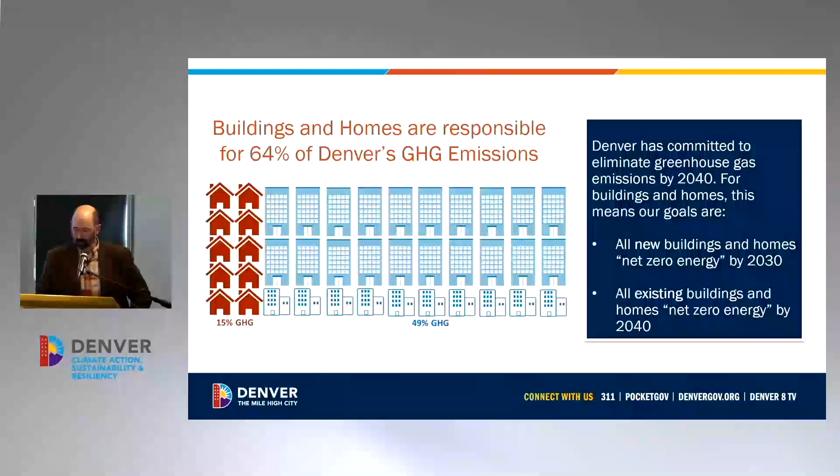And these are also the buildings that when we look at them, it's the space and the hot water heating. A lot of people talk about cooking and other appliances, but the bulk of the energy use comes from space and water heating.

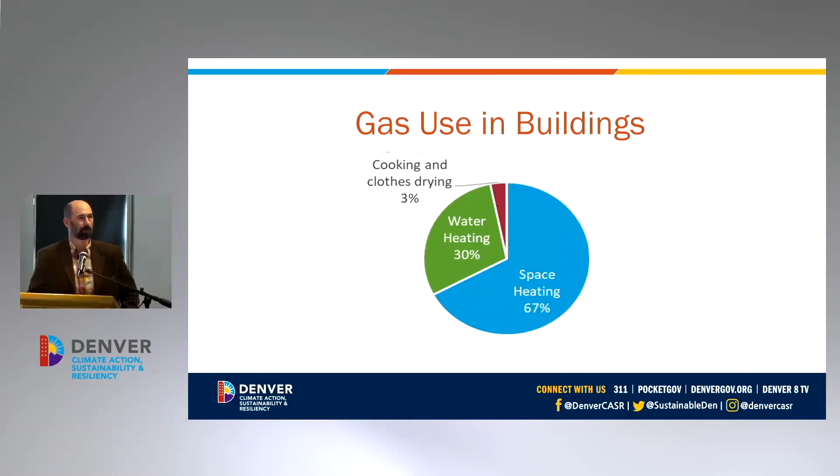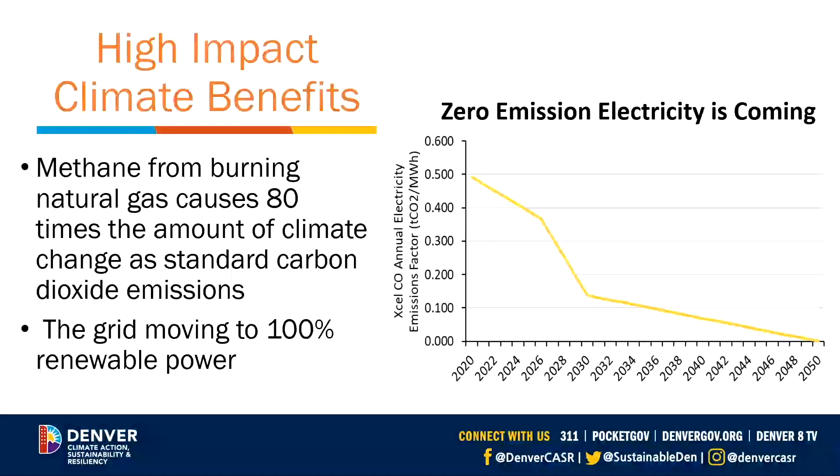So when we look at these, we also know that our grid is getting cleaner. We know that the grid will move to 100% renewable power, and that the methane that we're burning is 80 times more impactful for climate change than carbon emissions. So we have a clear and direct goal to reduce the impacts of burning fossil fuels.

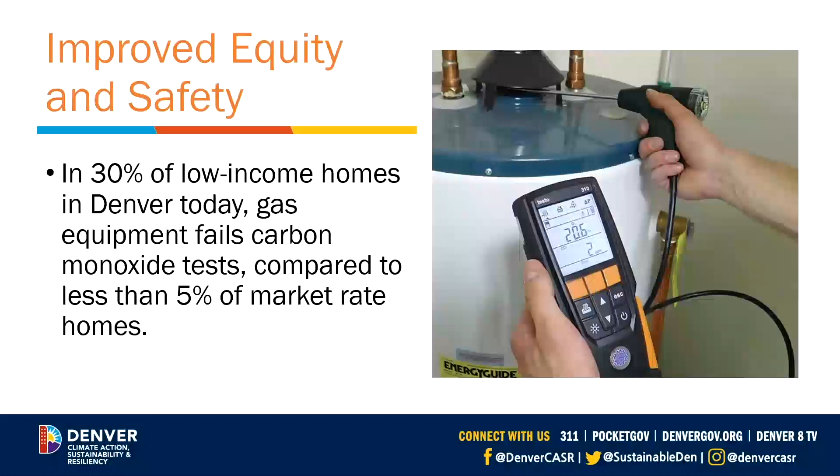We also look at safety and health and safety of people inside of buildings. And we know that 30% of low-income homes in Denver today have gas equipment that fails carbon monoxide tests. This is important that we look at these low-income, at-risk, and under-resourced buildings as a place where we want to have healthy homes also.

So what are we doing about that? We have actually looked at electrification requirements, and these requirements are really about at the time of replacement for equipment, and much like what Sharon and her panel talked about, they phase in over time. In March 1st of 2023, you'll hear me talk about March 1st, 2023 a few times today, the permit processing changes, and it changes for the gas systems and AC units that are for all building types.

And this is all the commercial and multifamily buildings, not just those over 25,000 square feet. And it is for the hot water, tank type hot water heaters, rooftop furnaces, AC units, and indoor forced air furnaces. And then over time in 2025, we were looking to replace furnaces, and rooftop units will be required upon replacement. And that is a shift that we're preparing for in 2023 and 2024.

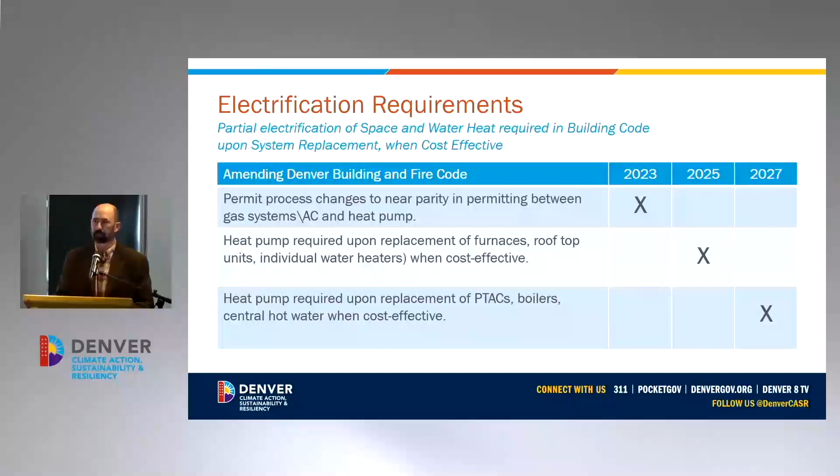And lastly, in 2027, the heat pumps will be required for what we sometimes refer to as our harder to electrify systems: PTACs, boilers, buildings like this on steam, and central hot water systems. And again, these are when it's cost effective and when it's achievable. And so the panel, we will talk about what that means today. What is achievable? What is feasible?

So as I talked about, the first deadline coming towards us is March 1st of 2023. And when you're replacing these systems, these unitary AC systems or condensing units, your hot water heater, your natural gas furnace, upon that replacement, we will actually be changing the code requirements, the permitting requirements change.

So the first thing you'll see is the quick permits are going away. Those are no longer going to be available. There will be ability for the replacement of emergency replacement. But again, that is something that is for emergencies only.

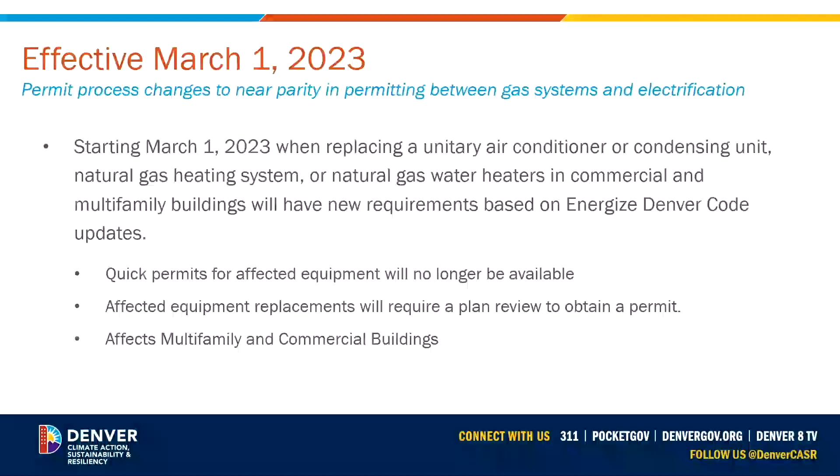This is not, for if you're trying to put your AC unit in January, it's not an emergency. We know that, but we will be monitoring those and working with building owners and contractors with community planning and development. And then we will also be changing how the permitting goes through.

And I'm going to encourage all of you to start this. If there's one takeaway, it's to start planning earlier for your equipment replacement, no matter what your building size is, and to start thinking about how to electrify. And Andrea will be talking more about that, and Celeste will be talking about that at the end, some of the equipment options, and to really make sure that you're thinking of all the options that are out there.

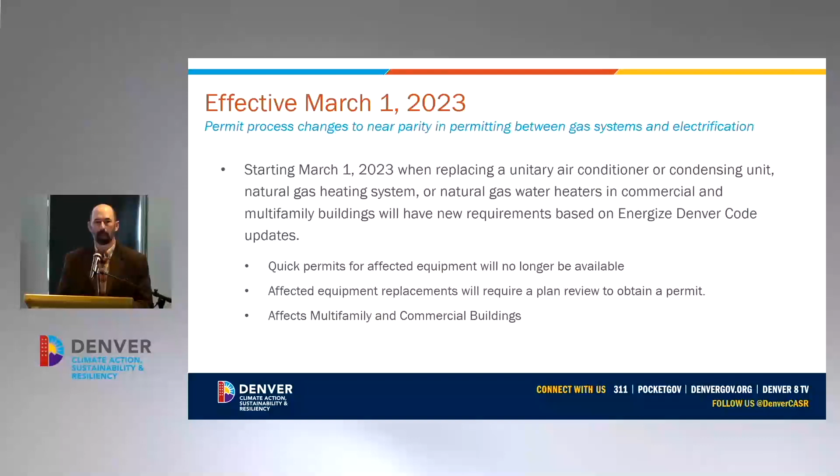And it's in 2023, it is still allowed to put in gas-fired and regular AC units that are non-heat pump, non-electrified, but the code requirements do change. So I would encourage you to check out community planning and developments requirements as we get closer to 2023, to that March deadline, and really understand what are the requirements for the right sizing, gas line leak testing, and for the emissions requirements and safety standards.

So as part of this, we're setting up an entire program. We know that building owners, especially those most at risk, are not able to just say, I see your code, I can afford to go do this, it's easy. These things will take some changes. So the first one we're setting up is feasibility reports.

These are one of the compliance pathways for if you're going to put in gas systems. This allows you to actually realize: can I do electrification? Can I do partial electrification in my building? What systems are able to be electrified at a reasonable cost for my building?

Our hope is that this is something that's educational for contractors, building owners, and for ourselves, to find the pathways to electrify buildings, and then push that back out to all of you through our website and through presentations like this. Our goal is to get about 1,200 of those through a year.

Ideally, these are buildings that are early adopters that are trying to figure out how do I electrify. And if they cannot, we're still allowing for natural gas replacements.

And to that end, we're trying to set up pilots right now. Both Pastor Scott and Kathleen will talk about the pilots at their sites. This is very much a learning by doing.

Denver's at the forefront of electrification, building performance standards, and a lot of things around climate action. So we need to learn by doing and understand how do we do this best. How do we actually stand up programs that are not just a prescriptive rebate that pays you per ton of reduction of emissions, or a standard rebate?

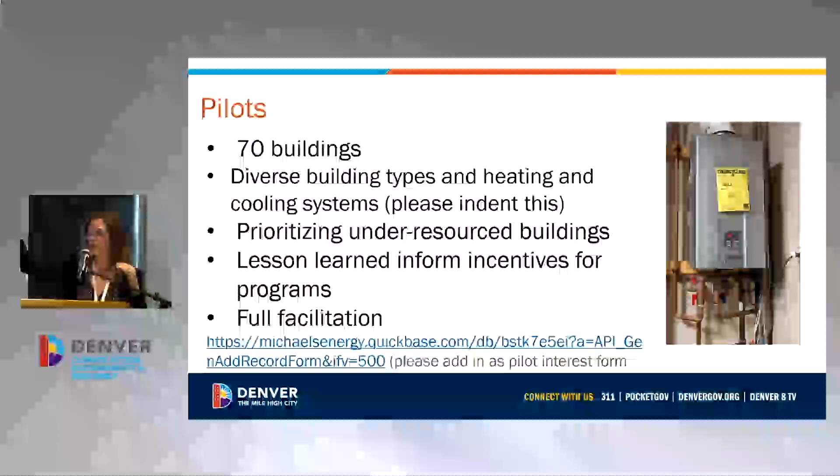There's going to be a program starting in March of 2023, which we're going to talk about. There's going to be an incentive program just for the electrification feasibility reports. And then also a program starting, probably rolling it out based on equipment type as we learn about different equipment types and what the costs are, what the challenges are, et cetera. I imagine most likely we're going to roll out one for heat pump water heaters first.

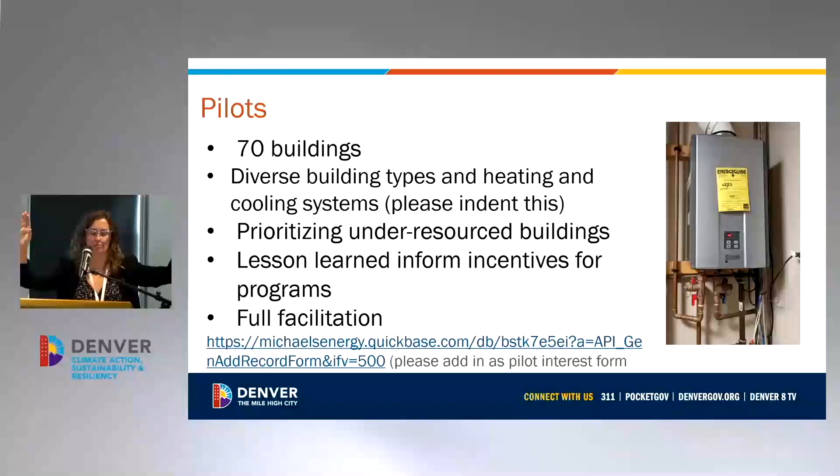And there will be incentives just for the equipment. The reason we're splitting those two is because in the pilot, you got to do both, okay? But if you decide, to heck with it, electrification is the way to go for me, it's going to reduce my EUI, I already know I want to do it - we're not going to make you do this. We're not going to make you do the feasibility report. You can just go ahead and electrify. That's great. So that's why it'll be 2 separate programs.

I want to give you a little preview, the Dork preview. This is the Dorky preview of the next 2 speakers.

So why are we doing all of this? We're doing it for buildings, right? Guess who is in buildings? People. People growing, people living, people crying, people laughing, people working. And that's actually what's motivating us is the people. You're going to hear from the people and what's actually happening in those buildings in a minute here.

So here's the Dork version of these buildings, and then I'll let these guys give you the human side. On your left, we've got Earthlinks, that's Kathleen. We went on site - by we, I mean Michaels Energy went on site.

But we are not doing these electrification feasibility reports. We partnered with 3 firms. We already taught them how to do the electrification feasibility report. So other people are doing this - Denver's not doing this, Michaels Energy is not doing this, right?

So Solutions Mechanical went with us on site. What they've got there at Earthlinks is they have a rooftop unit that has long since stopped providing cooling. It's starting to fail. They have a swamp cooler that kind of keeps it sort of comfortable in the summer, right? That's what they've got.

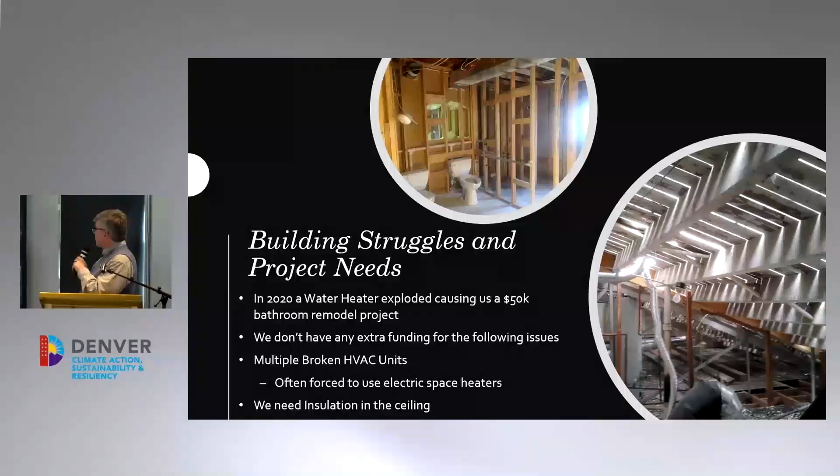Our roof has been replaced 3 times since I've been there. And the second time they replaced it, they had to strip all the shingles back, and we discovered that there was no insulation in the rafters. So we need insulation in our rafters as well.

Multiple broken HVAC units happens all the time. Right now, we don't have 2 of them that work on our rooftop, so we're using space heaters in one of the areas where the kids meet. So yeah, we have some needs.

So my desired outcomes, I would love to learn how to manage our energy more efficiently. I wear a dozen hats at the church, I'm the only full-time employee there. So I have to figure out how to take care of the building.

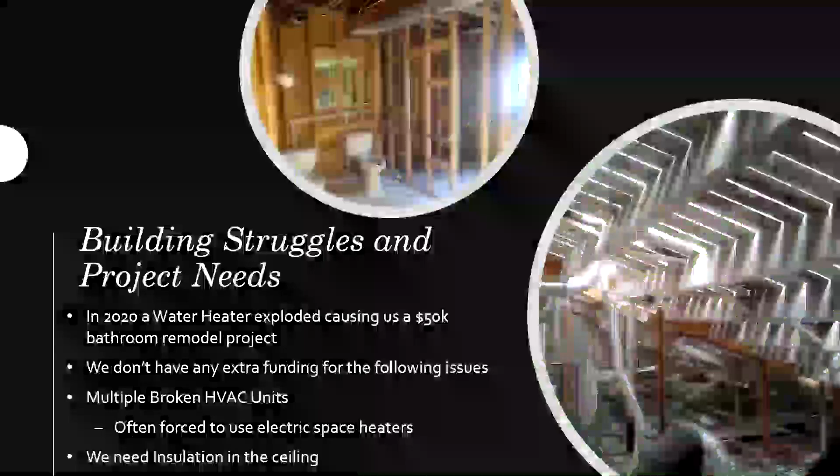I just now discovered after 20 years, I'm a quick learner by the way, that I can reduce our energy costs by not having everything programmed at the same time. I programmed everything on my 8 thermostats at the same time just to make it easier for me to remember the program, but because of that I get these demand charges which raise our bill through the roof. I just now figured out that if I can stagger the programming, I can lower our bill, and I can also get us onto a different energy plan at Xcel.

So I just learned that now, I should pat myself on the back for that one. And then also, I hope to lower our energy bill. So we will see, we're a pilot program, and we're looking forward to our partnership with these fine people up here. Thank you very much.

Hi, I'm Kathleen Cronin, also Vanna White today. I'm going to show you some show and tell. Thank you, I'm from Earthlinks.

Earthlinks is a nonprofit. We're located in Sun Valley, so we're almost neighbors to Westwood. We're right at the corner of 13th and Decatur. It's a bustling spot right now of construction, so if you can get to us, please come by.

We work with adults experiencing homelessness. We have 2 parts to our mission: one is to care for the planet while we care for each other. We've been around for 26 years. We have about a 70% success rate on getting people housed once they're in our program for more than 6 months and keeping them housed. And the way we do that is because we do case management without anybody knowing that's what we're doing.

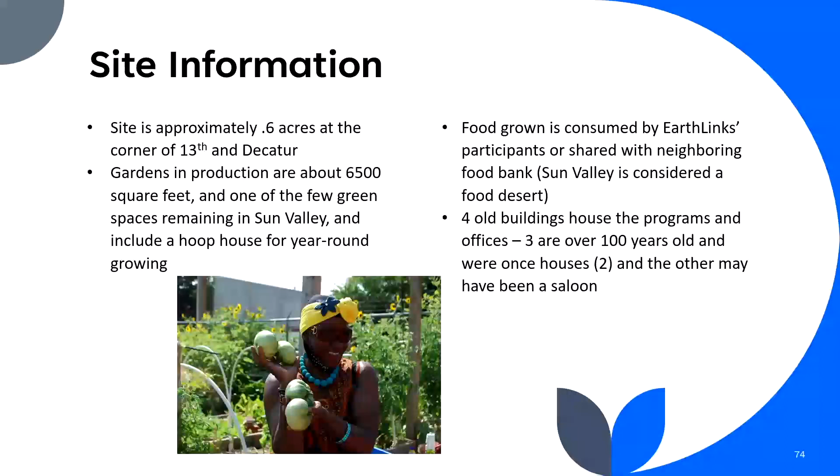So our site is about 0.6 of an acre. It's one of the few green spaces remaining in Sun Valley. Sun Valley has long been an ignored neighborhood in Denver. It's under a huge redevelopment process managed by Denver Housing Authority right now, and pretty much everything's going to be apartment buildings in the neighborhood. At the present time, our garden is about it for green space in the neighborhood.

We do open it up for the neighbors to come and visit, but the garden itself is managed by our community, so it's our community's garden. It's not a regular community garden. We have about 6,500 square feet in production in the garden right now, and we have 4 buildings on site.

So we purchased this property also really by faith, quite frankly, and a loan or two, but nonetheless, we purchased it in 2013. And the reason we got this property was because the beer people and the marijuana people did not want it. So we have on site our 4 old buildings and a number of other little sheds we've added, but the buildings themselves, 3 of them are all over 100 years old. 2 of them were homes.

They are in pretty dire need of being replaced. The 4th building is the building we're actually talking about in this project. It's our baby building. It was built in the 1960s. This is sort of a picture of it.

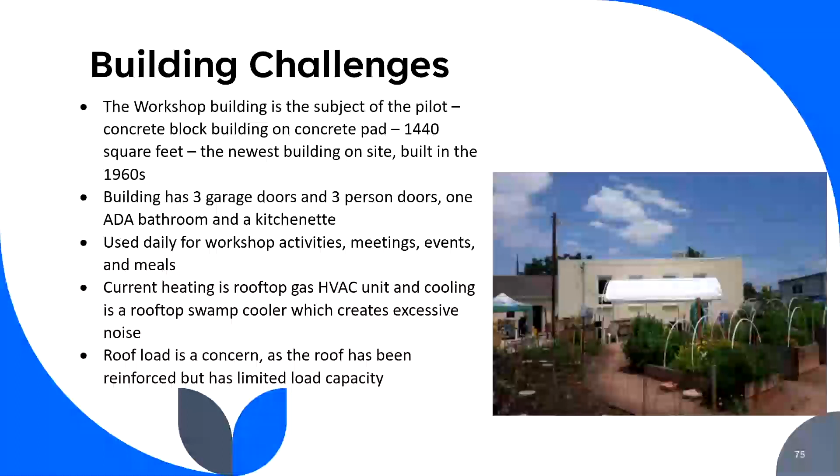We have a swamp cooler. We decided to do the swamp cooler when we did this because we felt it would be a better ecological choice for us to do. And I think it probably is, if you just don't need to talk or use anything in the building, it would really work great. But we can't really have our programming going on while it's running because no one can hear each other, or the stuff we're working on is blowing around. So that's been an issue for us.

So we've been really fortunate to be able to be one of the pilot projects, learning what's going to happen, just a few minutes ago. That's kind of what we're doing there.

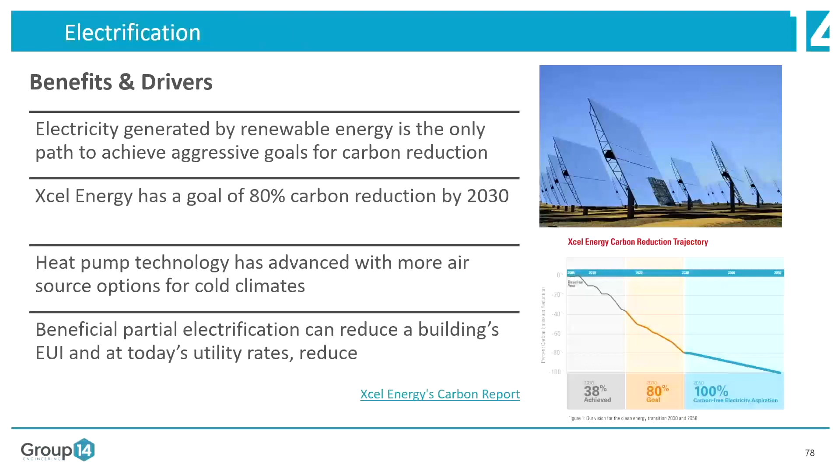So we've heard a little bit of this as Jeff started on this really awesome trajectory. We're very fortunate that a lot of our projects looking at decarbonization have Xcel Energy doing a lot of this for us on the electricity side. That trajectory is going down to 80% reduction by 2030, with goals to have a completely emission-free electricity supply by 2050. This pushes us towards electric energy for all of our needs - cars, heating, water heating - taking advantage of what the utility supplies and what we can also supply. We can't drill our own natural gas, but we can put up solar panels, or subscribe to community solar to get to truly carbon-free building operation.

One of the other drivers here is that heat pump technology has come a long way. I'll touch on a couple things where we still need improvements, but it's getting there so we can do cost-effective operation. Electric resistance heat has been around a long time - there's buildings in Denver already - but they're pretty expensive to operate, so we're looking at heat pump technology. Also looking at partial electrification. We heard that some of the buildings in the pilot are going to keep some natural gas, and that can be a key component to reduce first cost and those peak monthly costs we heard about at the church.

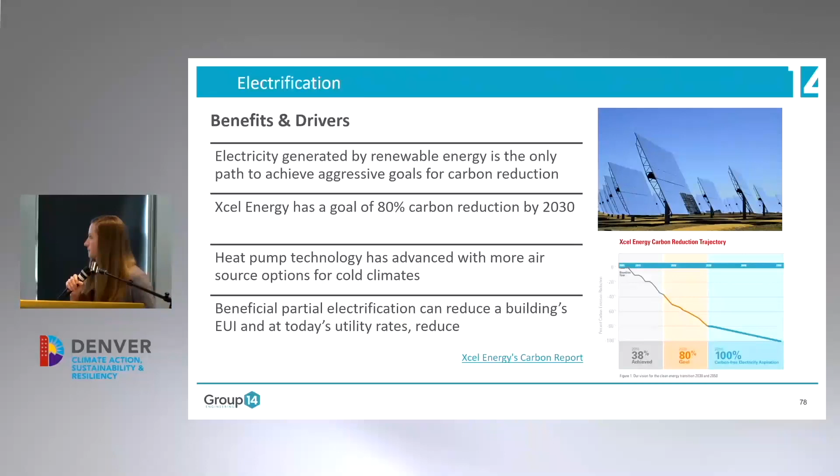Oh. Here, Zach. All right. So this is where we're talking about that partial electrification. See if it comes back. We'll just keep going - do we have any thoughts on this?

The easy-to-electrify or medium-to-electrify systems are going to be our early categories of focus. Some of the timing of when we're looking at electrification - we intentionally put up a picture of a building that's very gutted. That's going to be your easiest time to electrify, when you're already replacing the piping and getting stuff down to basically the structure of the building.

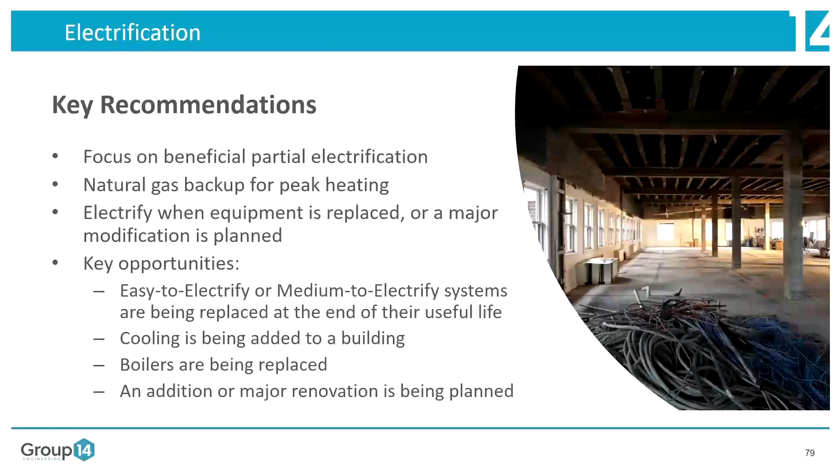There are other times where you're at least adding cooling or replacing your boilers, so there are key points in time when electrification makes the most sense. The code is requiring electrification at the time of replacement when you go to the building department. The city at this point is not going to any building and saying you have gas equipment, rip it out - that's not in the current plan. What's in the plan is that when you go to replace it, you're going to have specific requirements.

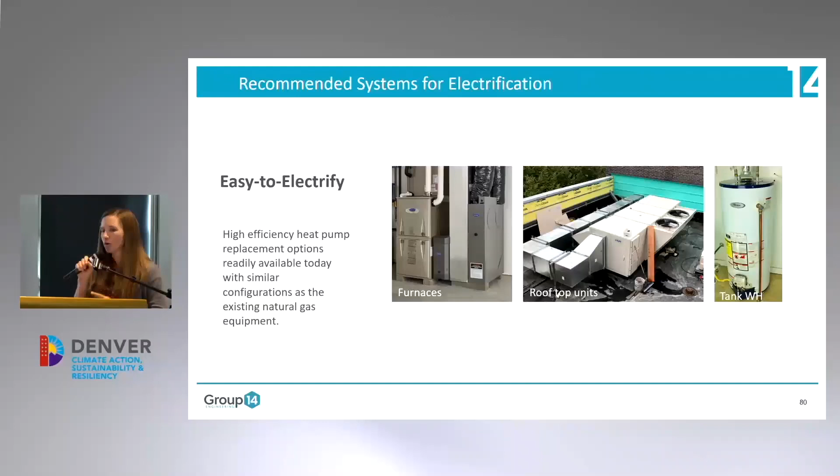So we have the guide divided into a few different sections. One, the easy-to-electrify, aligns with what's going to be required in 2025. This is also what's going into these electrification feasibility reports - EFR, that's a lot easier to say, so I'm going with that too. These are the equipment types. The reason we're calling them easy - I prefer easier - is because there are still some changes required, but they're easy because they're available today.

There's equipment that is very similar, looks pretty similar, and can often go right where the old equipment went. You might have to do some modifications to the roof curb, but pretty much the rooftop unit replaces the old rooftop unit, or the furnace replaces the old furnace. So limited modifications, good prices - some even at the exact same price as a cooling-only unit, you could get a heat pump version for a very similar price.

The tank water heater is another one where there's a bit more effort, because tank water heaters typically have no electric supply now, so that requires some electric supply, but it's the same physical size for the most part and connects to your pipes the same way. In the guide, it gives more information on each system type, considerations and challenges when it might not work, things like refrigerant line lengths. Won't get into that today, but keep an eye out - the QR code and link are there.

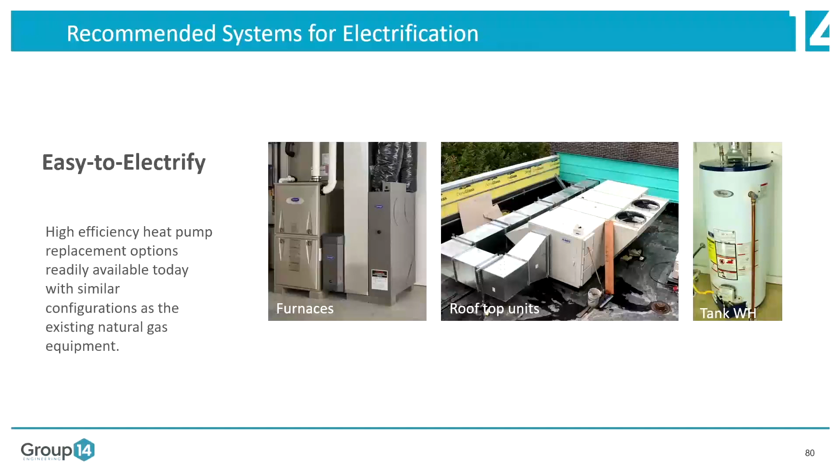The medium-to-electrify - this is a subset that's not going to be required in 2025 because this equipment is more intrusive. There's more replacement involved. What we categorize here is equipment available today in heat pump version, it just requires more invasive replacement. So you're going into every zone and replacing PTACs or VTACs. Unit ventilators are often found in classrooms, and there are heat pump options available for these today.

You can get a split air handler, it's just a lot more challenging in some of these cases. It requires running things throughout your building, refrigerant lines that you may not have today, so it's more expensive and really makes a lot more sense when your building is in that gutted scenario. But we put this in the medium category because you can get heat pumps - that's really the big focus. You'll keep hearing about heat pumps, we love heat pumps because they have 30% of the energy cost of electric resistance, so this is really where it becomes aligned with our operating cost needs.

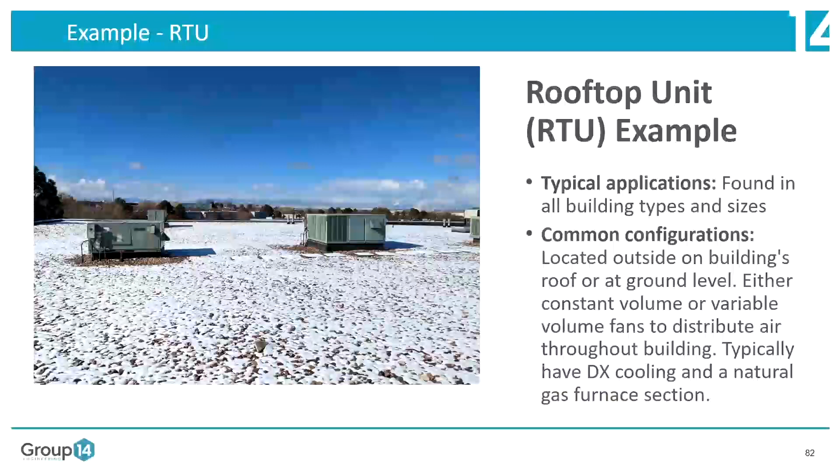Just an example, and I think the examples we saw here, I'll go through quickly since we already heard about this rooftop unit. You can replace these rooftop units with a very similar unit that instead of cooling only, has a heat pump that can both heat and cool. It looks the same, often has a very similar profile. Any new unit will be slightly different, even a new rooftop unit with cooling only will be slightly different, so there'll be some modifications. We'll have to work with an electrical contractor for the connections and a mechanical contractor for the air side.

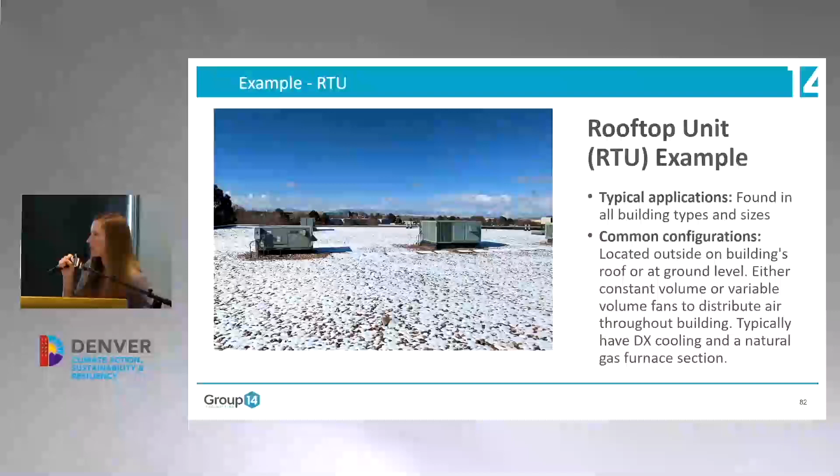But these are some of the details that get into the guide of what we'll have to consider. So there's that backup heating. We heard today that those rooftop units at the church might still have electric backup. There might be some that keep the gas backup. So those are types of considerations.

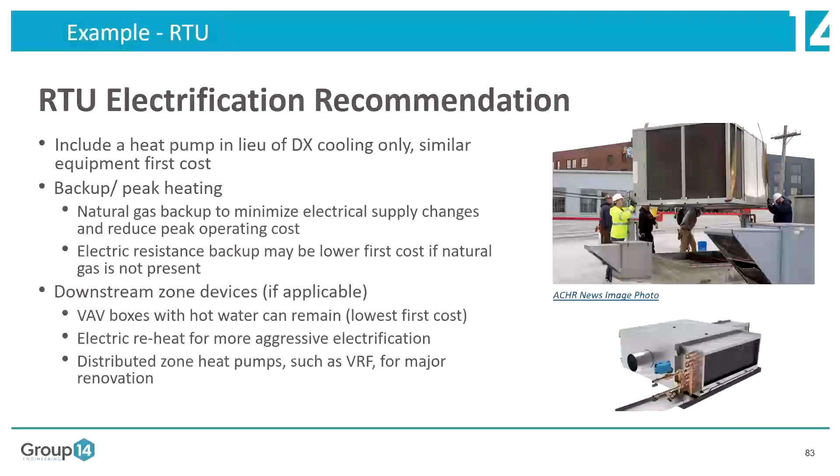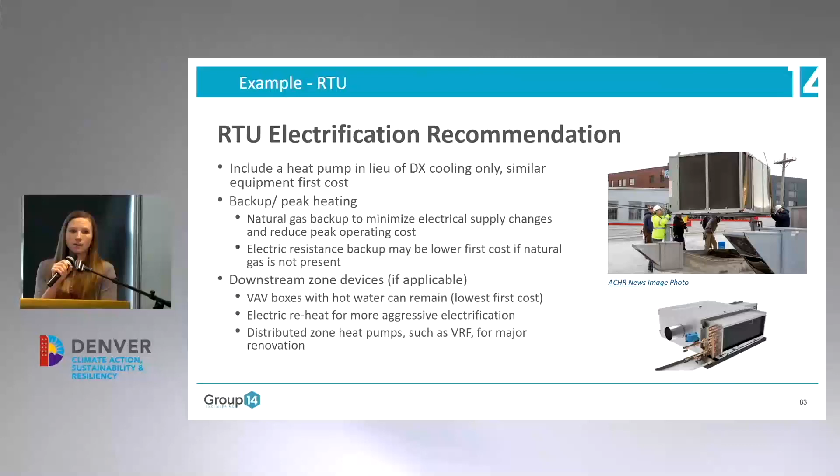There's also different nuances to what's happening below that rooftop unit. It might be a single zone, and that's all the heating. It might be a multi-zone unit, and then you have different considerations for what happens to the downstream equipment. On the ones we're working on now that have multi-zone units, you can leave everything downstream the same, and that's more of that partial electrification scenario. However, the downstream units, if it's electric resistance heat, if it's hydronic heat, that can remain and can be a phased project.

Our last category here, which we're calling the hard to electrify, is currently targeted for 2027, with the caveat that it's cost effective and has system options available. These are really our more challenging equipment options right now because there really aren't heat pumps available. These are your boilers, steam systems. We heard this building is steam, which means it's very high temperature, either steam distributed or high temperature hot water.

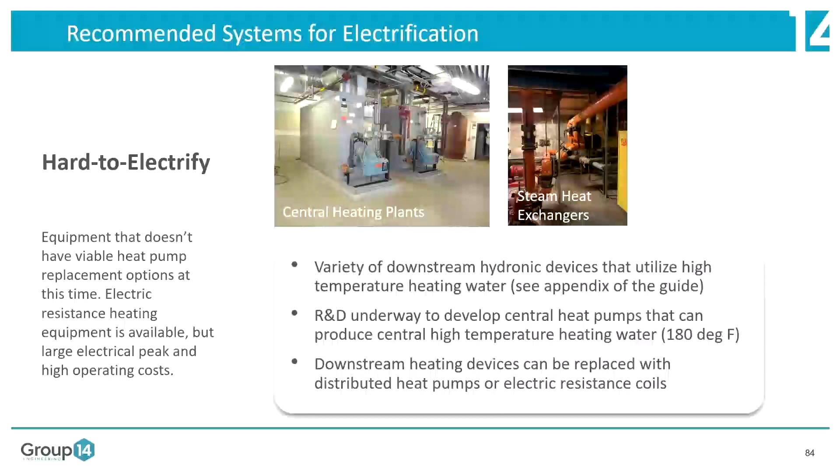We're talking 180-degree water circulating throughout the building. There is not currently heat pump technology at a large scale. It is in research, it's not that it doesn't exist, it's just that you can't today go buy a boiler replacement as a heat pump that could serve a 200,000 square foot building and produce 180-degree water. It is in research, it's a priority, we do expect them to become available. So that's really what Denver, and what we're all in this space, is hoping - that by 2027 you can just pop out that old boiler, pop in a heat pump, and be on your way.

That's just not currently available today. You can get electric resistance equipment. So if you're just saying, I want to do it today, I have to replace the boiler, I don't want to do any more natural gas, you can do an electric resistance boiler. It's just going to really hit you on the operating cost side and that big electrical supply. So we do have people considering that today to replace their steam, to replace their boilers. It is possible, but we are also encouraging some people to just wait a little bit longer.

If you can wait a few years - I mean, even in the last few months, I've heard of new equipment using CO2 refrigerants that can get higher lift. It's happening. So if you're in a position where you don't really have to do anything yet, you might want to wait a bit before you invest in a new boiler that can last 20 plus years.

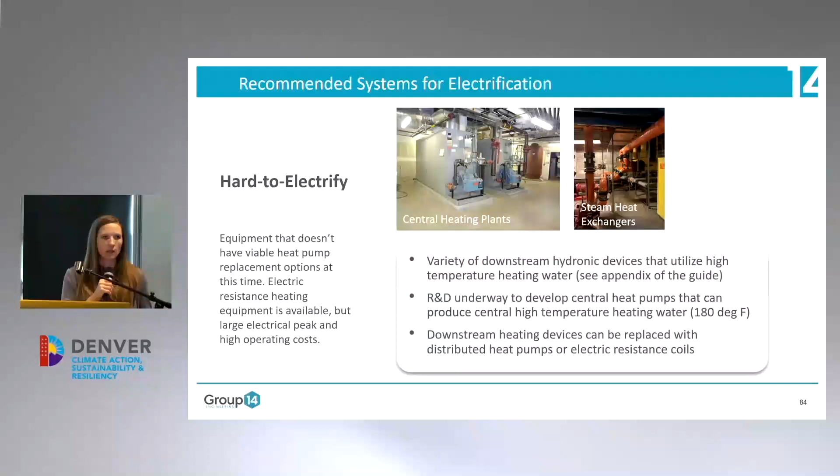So yeah, and this one, you can also do those downstream devices. You could just switch to having distributed heat pumps downstream, having VRF. We do have many buildings that just say, no, I can't deal with 200 heat pumps in my building, I need my one heating device. So that might not be an option for everyone, but it could be a consideration if you are doing that big remodel anyways.

And that wraps up - so it was really just a highlight of the guide. Tried not to be too technical on it, but we do have information in there. And through all of these great programs and pilots and examples, you can get support to see how this would work well for your building. Thank you.